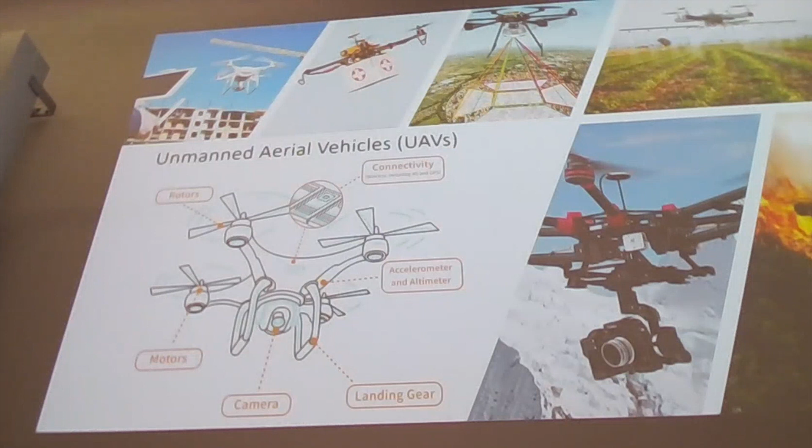They have different kinds of physical devices like rotors, motors, and sensors, a camera or accelerometer, and this makes them pretty sophisticated in terms of testing. To give you more detail on the architecture of this kind of system, this is not specifically about drones. This is called a robotic cycle.

So the cyber-physical system or the robot interacts with the environment. It gathers data from the environment through its sensors. The data comes to sensors, and then it's passed to the software part, which can be classified into 3 levels. The perception part that deals with the data that comes from the environment, mapping or estimating the state of the system, and then planning the next actions of the system to reach its goals.

And the control part that deals with controlling the actuators; in drones, it would be controlling the motors, so the maneuvers and the movement of the drone are as we expect. And then this controls the actuators, and then the effect gets back to the environment. So the drone moves, and we have the next loop of this whole process, and we have new data from the environment.

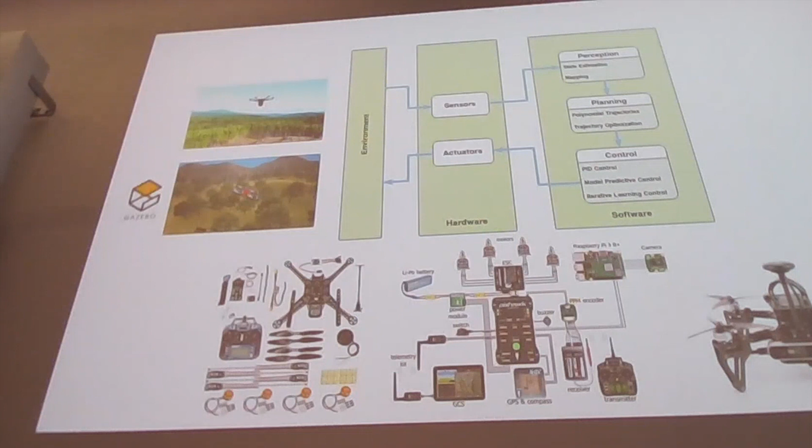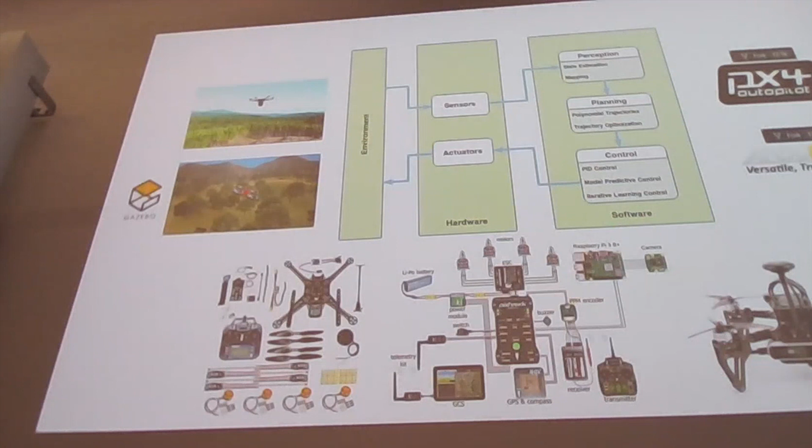Because there are many different manufacturers and many different kinds of mechanical and electronic parts, it's hard to develop software that really can interact with many different configurations of them. So there have been developments also in the software part. There are 2 very popular software platforms for drones, which can also be used in other kinds of robotic systems. PX4 and ArduPilot both have a very strong community on GitHub, and they are very configurable, so they can support different kinds of drones, different kinds of motors, different sensors, and so on. But this also makes it a bit more complicated for us as software developers to first develop and then test our system.

So how cyber-physical systems in general and drones in particular are tested right now, the de facto standard, is field testing. You develop the code, the firmware or the software, and then you go to the field, put it on the real drone, and try to fly it. This is, of course, reliable. You can be sure that the behavior that you see in the test is similar to what you will have in production and in the real environment that the drone will interact with.

But this is not something that you could reproduce, because there are many different environment factors, and each time you do it, these factors could be different, so they are not easily reproducible. You cannot really test many different scenarios with different conditions to be able to guarantee some kind of reliability or safety of your whole system. They're expensive, they need a lot of manual work, they're time-consuming, and this could also be unsafe both for the people who do it and for the devices that are being used in the test.

So simulation-based testing is an alternative that is used for this task. Of course, simulation is reproducible and scalable. We can even automate it in a DevOps pipeline. And in comparison with the field test, it's much more affordable, and it's definitely safe. But the question is, is it really reliable? If we test a drone in simulation and everything goes well, can we really guarantee that the same situation would go the same way if we go to the real world?

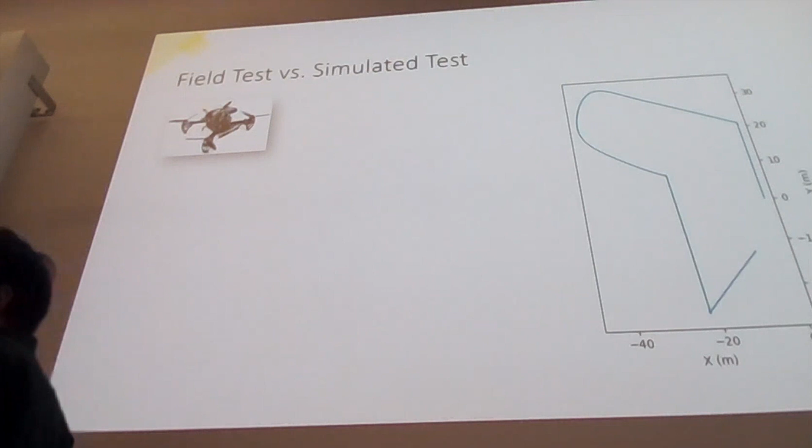Then, since PX4 logs almost everything that is done during any test, I took the log, I extracted the commands that PX4 received during my manual test, and I automated sending exact same commands at exact same timestamps to the simulated version of the drone. And you see that the trajectory that I got was not really that similar to the one that I got from the field.

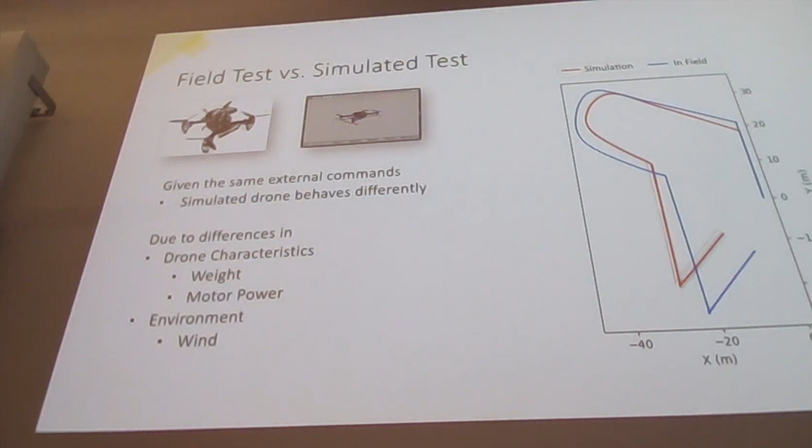So given the same external commands, the simulated version of the drone didn't really behave exactly the same. And this could be due to differences in many things, like the simulated drone characteristics are different from the real one, the weight is different, the motor power is different, or the environment could be different. I could have some wind in the real world that I didn't have in the simulation, and so on.

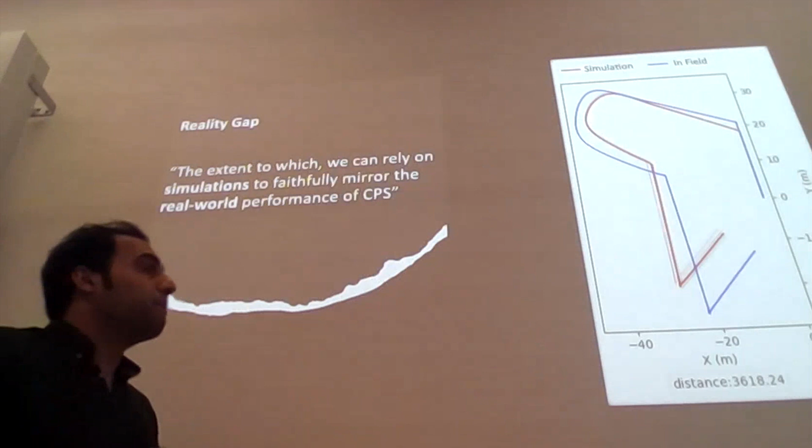This is a very known phenomenon when we deal with simulators. There's always a reality gap between simulation environment and the real world. And this can be defined as the extent to which we can rely on simulations to faithfully mirror the performance of the cyber-physical system, in this case, the drone, from the real world. So this could even be quantified with some distance measures or similarity measures that we could define.

So we took the differences between the two trajectories with the metric that I will show you later, and we got some pretty high differences between the two trajectories.

So the literature here is not really much in terms of the testing of the software. There has been a couple of surveys with the industry, robotic and drone practitioners to see what is the state of the testing in those companies or in those industry partners. And they identify reality gap in the simulation, which I talked about, as one of the biggest obstacles of testing

this kind of systems. And also, if they have some bugs and they want to debug it, it's really hard to reproduce those bugs that they have from the real environment in the simulation, so they can debug and then maintain, or they can improve the quality of their system.

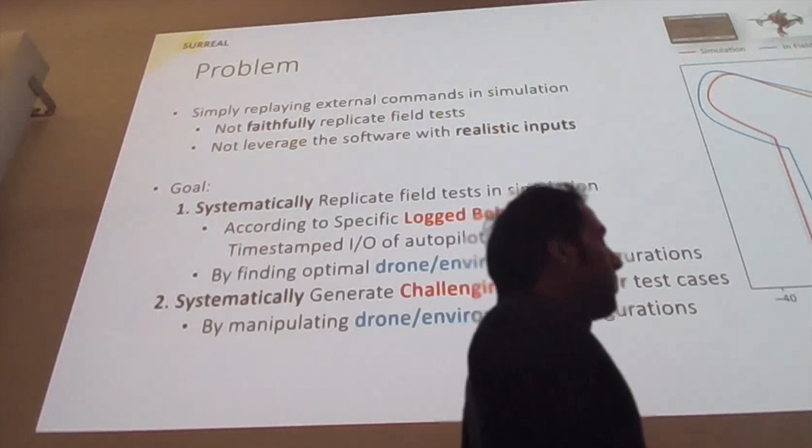After this first step, we have a replication of the field test from the real world in the simulation. But can we generate, based on this replicated flight, more challenging but still similar scenarios in the simulation? This way we can diversify our test scenarios, generate more challenging ones, and even guide the next field test to know what kind of configurations could be harder for the drone to follow.

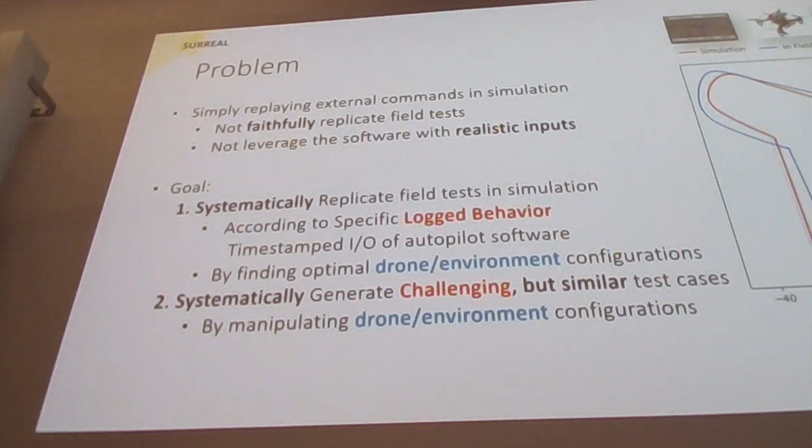So we can go and test that specific kind of configuration, by also manipulating the environment and configurations. I will go into more details.

To be able to do so, first we need a tool that lets us do large-scale simulation experiments on the drone. For this, I developed a tool called Aerialist. This can be seen as a test bench for drones based on PX4, and it has different modules.

There is a simple test description that comes as input. We define the test that we want to do, and it automatically configures the simulation environment and the drone that we want to test, and monitors it throughout the flight.

The important thing is that it supports both the simulation environment and the real world. So the same commands could be sent to the real drone in the real environment, and to the simulated version in the simulation environment. And then we can compare how different they are.

And if we use it with the simulators, we can also generate a simulation environment based on the configuration that we sent, like placement of obstacles, configurations of the wind, and so on.

And the output could be the logs of the flight. So we have logs of everything that happened during the flight - the inputs, the sensor values, the outputs, the trajectory, and everything. We can then use this log for post-mortem analysis and see how different these tests are.

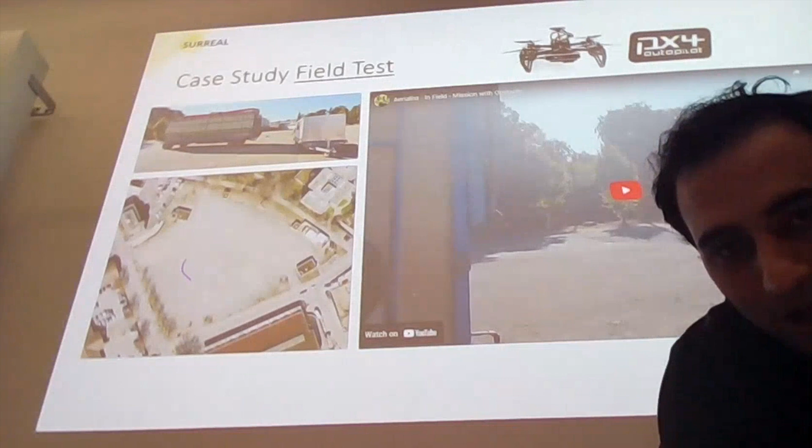Around our campus in Zurich, I found some places that were good enough for the test we wanted to do. And luckily, I found some obstacles in the almost empty parking lot. So I took advantage of this good timing and did an autonomous flight with the drone that we had.

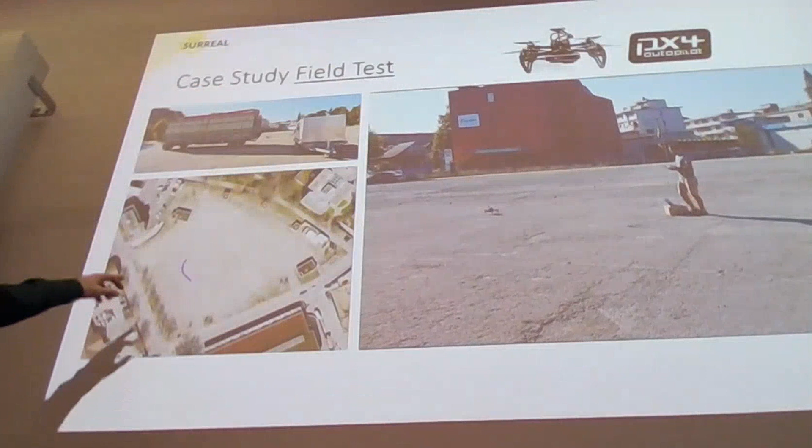So the mission was flying from this spot here to this spot, but there were some obstacles in the map. The drone should go around the obstacles and act safely.

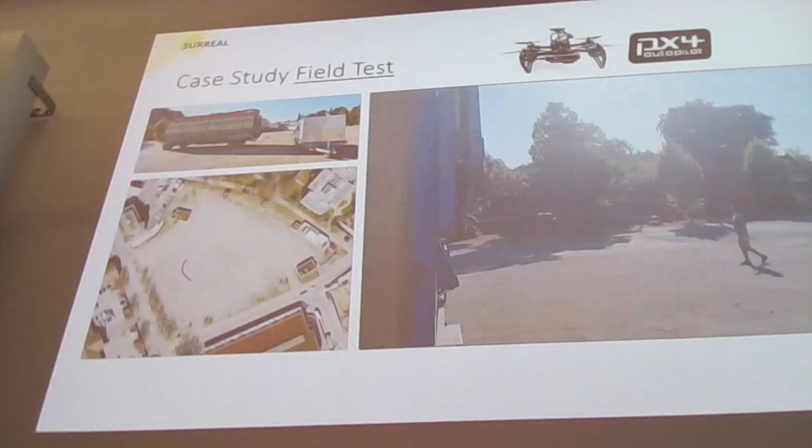An interesting thing was that the autopilot around the obstacle was very cautious. It lowered the speed, but as soon as it was free from the obstacle, it really sped up and landed at the landing point. And this was the trajectory that we got from the test.

So we have two research questions. The first is flight replication. Specifically, with the log and the flight that we saw, can we find the configurations of the environment? Here we just include the obstacle configurations, the size and the position of the obstacle. Can we place an obstacle in the simulation environment to faithfully replicate a real-world autonomous flight trajectory?

So the goal is to replicate the trajectory by placing the obstacle in an optimal position. And then can we generate more challenging scenarios based on the replicated version of the real flight?

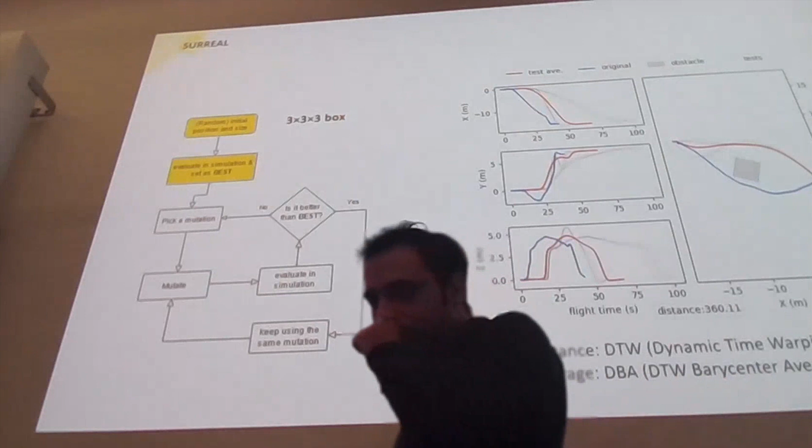Specifically, can we force the drone to violate the safety distance to the obstacles by placing an additional obstacle in the map? So we developed an iterative algorithm to find the position of the obstacle.

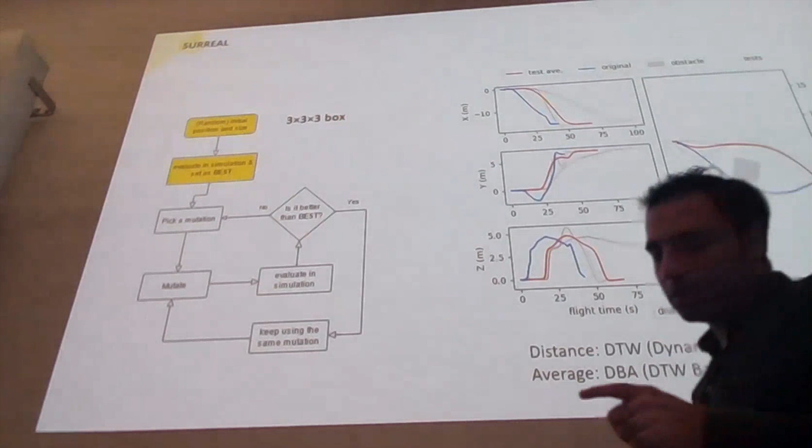We start with the initial position and size for the obstacle. Specifically for the log that we saw before, the blue line is the real world trajectory, and the red one is the average of 5 runs of the test with this specific obstacle that we put in the simulation. And the goal is to make these two lines match on each other during the process.

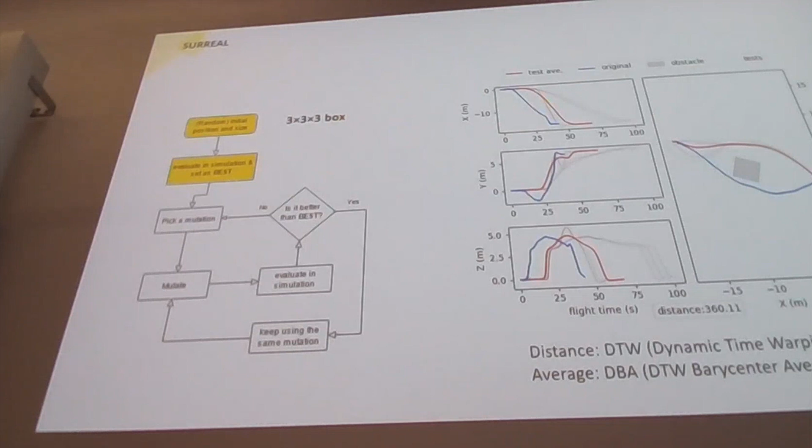So we start with the initial 3×3×3 box, and we evaluate in simulation. With evaluation, I mean finding the distance between the two trajectories using dynamic time warping, which is a pretty known metric for distance of time series. And then using the mutations that we have, simple mutations like moving the obstacle, resizing the obstacle, and rotating it.

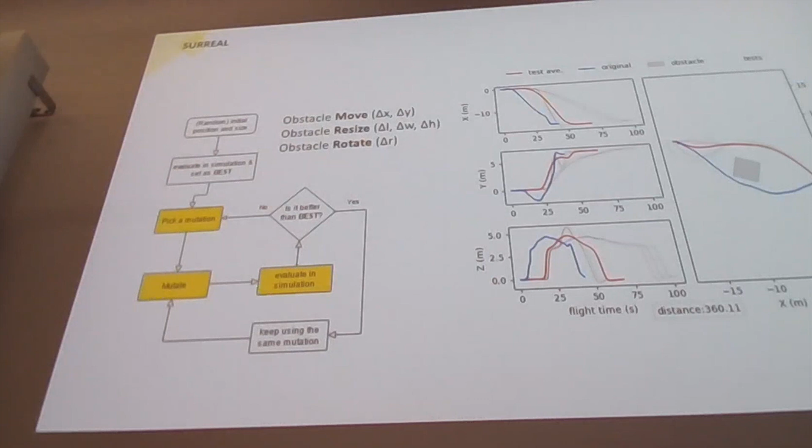So step by step, we pick a mutation operator. We put the parameters, like the delta x, the parameters of the mutation operator, and then we evaluate it in the simulation environment. And step by step, we can get better. We can find better solutions.

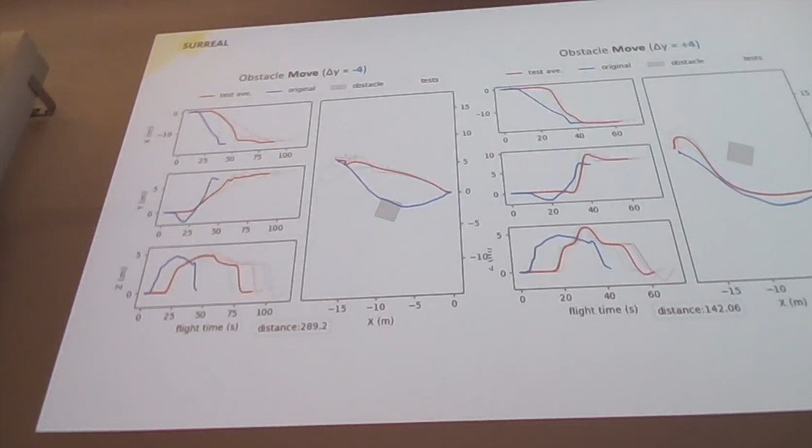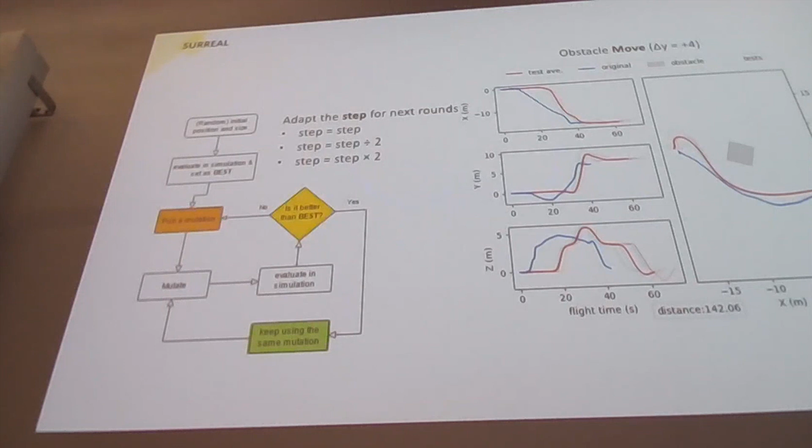As you see, we change it up and down, and then we pick the one that is better in terms of the distance, and then continue mutating on the new best solution that we have. By iterating through this process, step by step, we get better and better solutions until we reach a plateau that we cannot go beyond.

So in the end, we were able to push the obstacle to the right position and find its size and rotation angle so that the trajectories are almost identical.

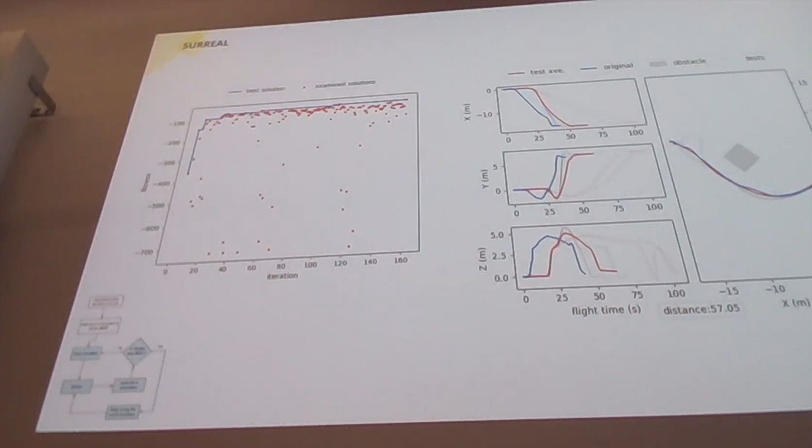For the next research question, we took another test case. Here we needed bigger obstacles that were not possible in the real world. The obstacle here is 20 meters high, like a building. And we wanted to see if we can make this.

And we use the same process, but with a different distance measure. The distance measure is trying to force the trajectory to be closer to one of the obstacles and make it a bit unsafer for the drone to follow.

Iterating through the same iterative process, we were able to minimize the distance of the drone to the obstacle. Specifically, we were able to make the drone act non-deterministically, meaning that if we run the same test case multiple times, different outcomes occur.

In some of them, the drone would act safely, going round from the left of the first obstacle. In some cases, it would get too close to the obstacle, but not crash into it. And in some cases, we even saw crashes of the drone into the obstacle.

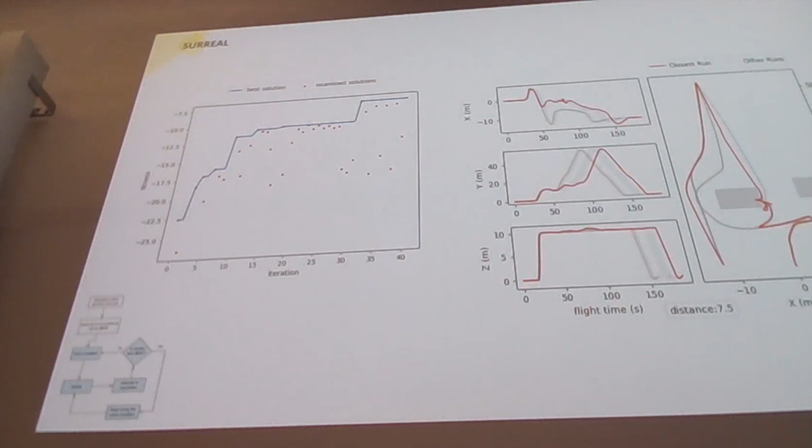So we found some very specific positions for the second obstacle that make it really hard for the drone to follow. Interestingly, if we make the second obstacle a bit closer to the first obstacle, these in-between lines disappear, and the drone would always go to the left and be safe during the whole flight.

So for future work, we want to try optimizing other environment configurations. Here we focus on obstacle position and size, but we could also check with wind, the ground surface, or more complicated obstacles like trees.

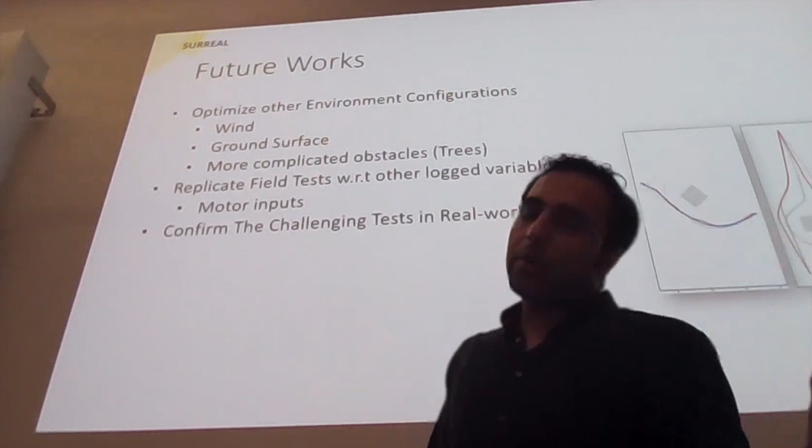Also, replicating the field test with respect to other logged behavior—here we had the trajectory of the drone, but it could also be motor inputs and so on. And importantly, we have found specific obstacle configurations that make it really hard for the simulated drone, but is it really also very hard for the real drone? This is something we also plan to explore.

Okay, so my talk is over. Just a summary: I introduced the drone a bit, its architecture and the simulation environment we have for it, the reality gap we face when testing drones, and the algorithm we proposed for replicating test cases in simulation and for generating more challenging test cases based on the replicated version. Okay, thank you very much.